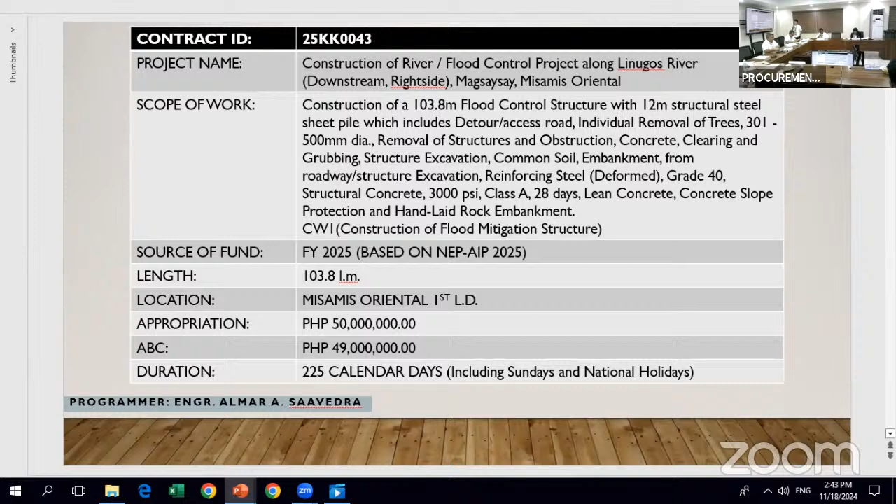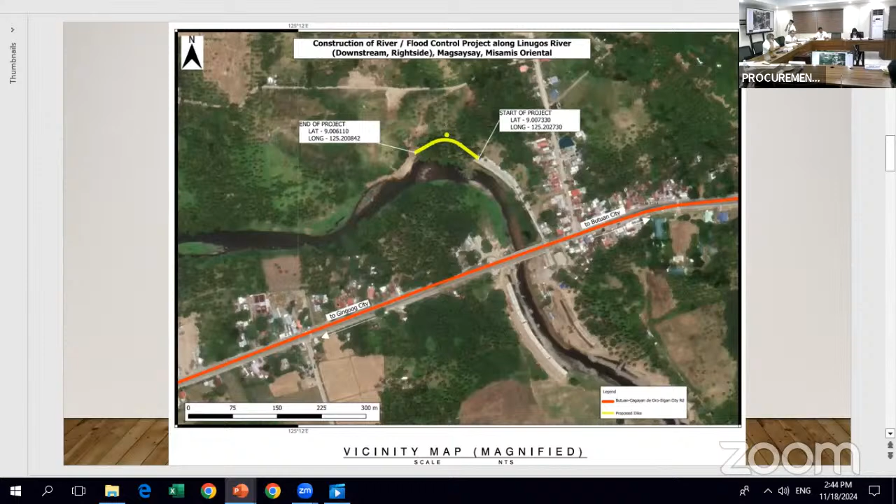This is the location map reflecting the footprint of the proposed flood control. Next are photos taken during the survey.

This is the plan and profile with a 1.5-meter freeboard. This is the proposed flood control.

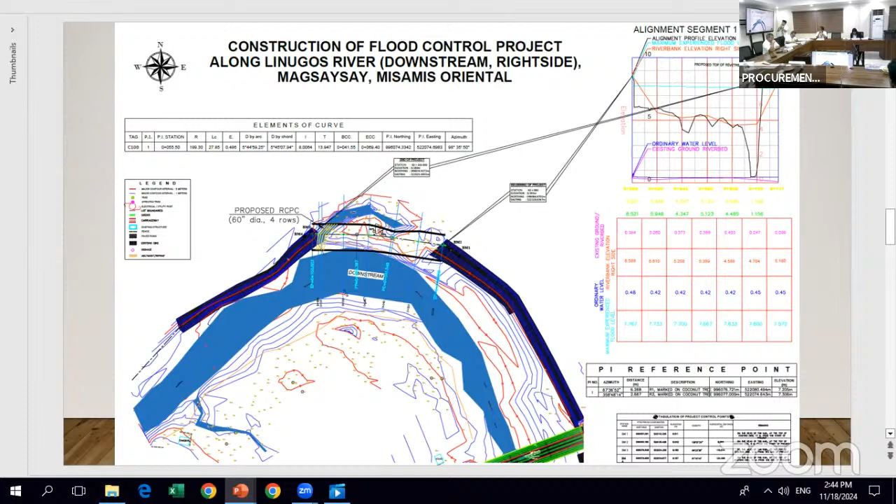This is the typical cross-section for the proposed flood control, with a 2-meter crest, 1-meter berm, concrete slope protection, lean concrete, and hand-laid rock embankment.

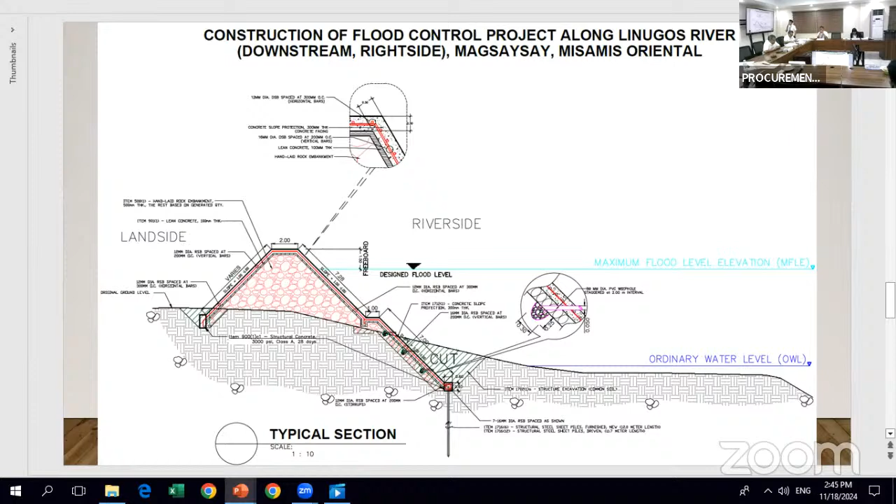Here is the specific bill of quantities for this project. We have provision of field office for the engineers, 7.5 months. We have provision of furnitures, fixtures, equipments, and appliances for the field office for the engineer, one lump sum, which consists of 2 sets of computers.

Next is the project billboard and signboard, each. Occupational safety and health, 1 lump sum. Mobilization and demobilization, 1 lump sum. Detour access road, 1 lump sum, which is beside the road, to make an access road.

Individual removal of trees, 32 each. Removal of structures and obstructions, 600 cubic meters. Clearing and grubbing, 3,285.75 square meters, and structure excavation, common soil, 3,285.75 cubic meters. Embankment from roadway excavation, 657.15 cubic meters.

As for the reinforcing steel grade 40, we have 2,500.74 kilograms. We have structural concrete, 3,000 PSI class A, 28 days, 94.08 cubic meters. Lean concrete, 283.18 cubic meters. Concrete slope protection, 835.23 cubic meters.

Pipe culverts, 1,520 mm diameter, class 4 RCPC, 96 linear meters. Structural steel sheet piles, furnished and driven, 2,076 meters and 2,024 meters respectively. Lastly, hand-laid rock embankment, 3,536.09 cubic meters. Next are the minimum equipment requirements for the said project.

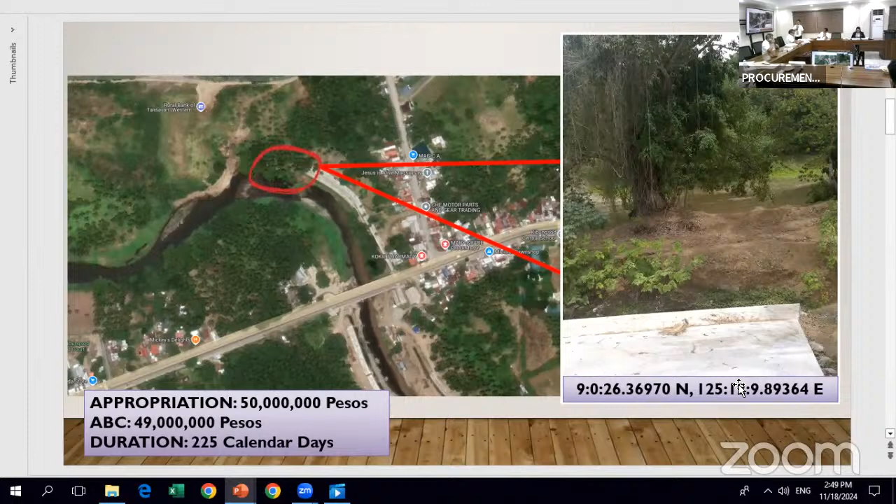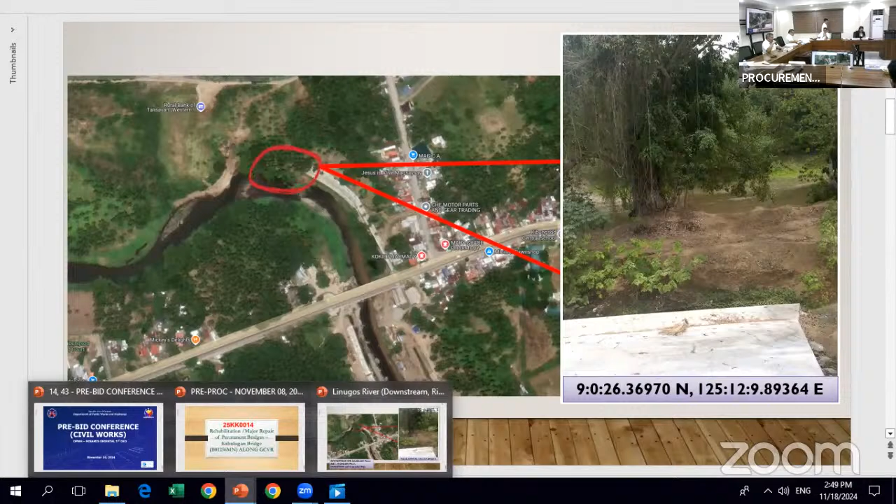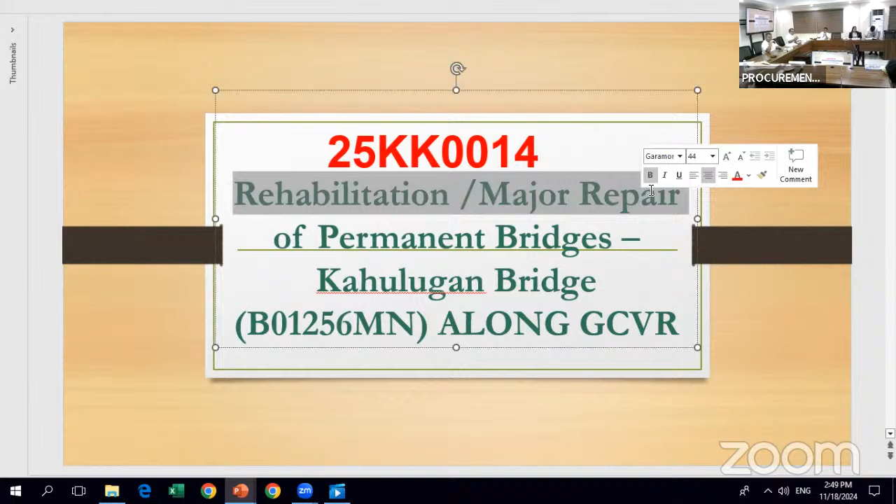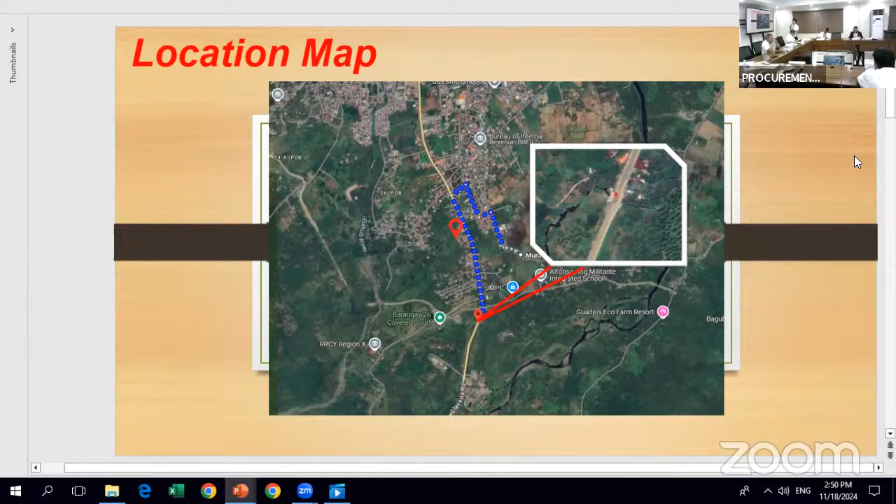Good afternoon, ma'am and sir, and our YouTube live viewers. So, for the second project, which has a contract ID of 25 KK0014, or widening of permanent bridges, Kahulugan Bridge, along GCVR. So, this is the location map, which is located at Barangay Kahulugan, Gingoog City, Misamis Oriental.

So, the total bridge length is 15 meters with an appropriation of 15 million, approved budget cost of 14,700,000, and project duration of 197 calendar days. So, this is our topographic map of our project.

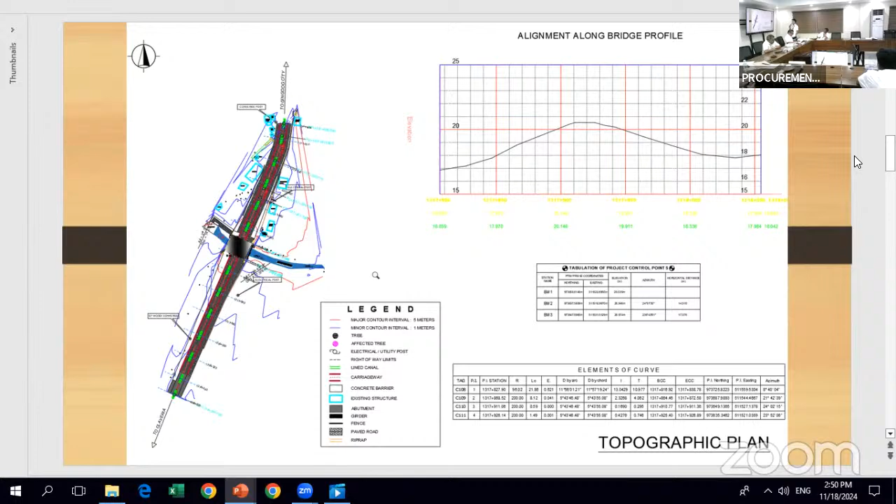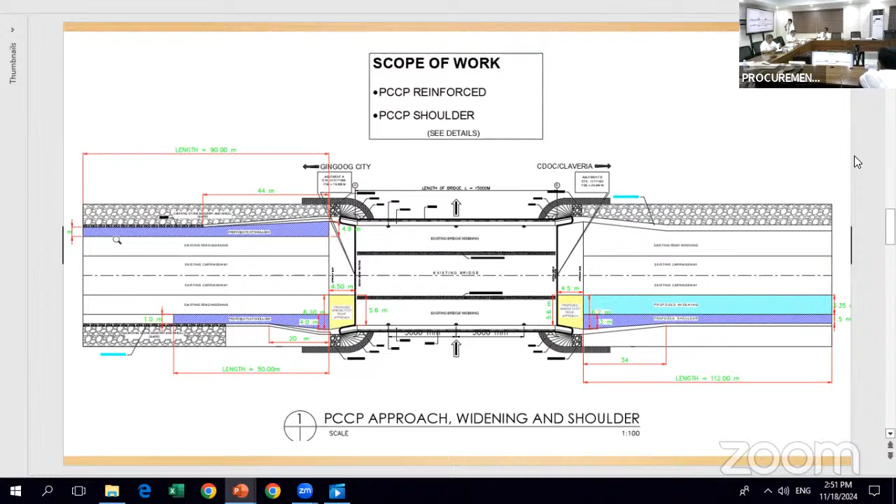And these are the scope of works of our project. First, we have PCCP reinforced for our approaches, and then we have PCCP shoulder. We also have stone masonry for our slope protection, and then we have wheel guard and painting of wheel guard.

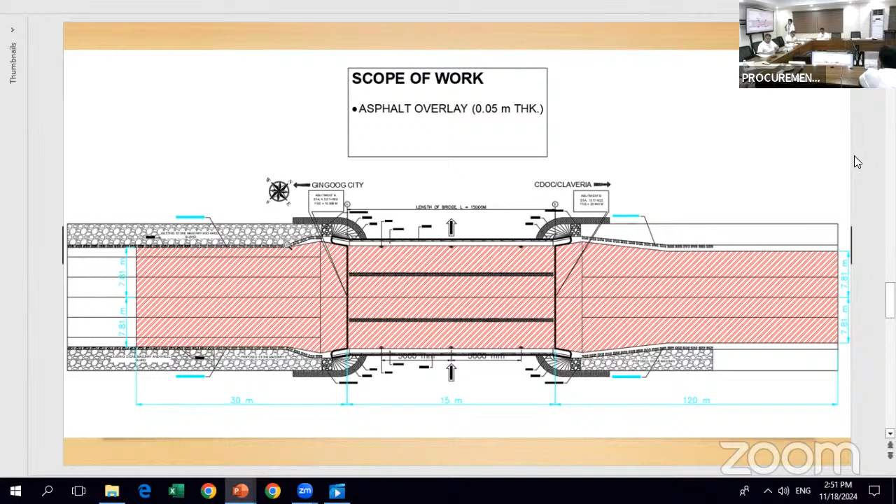We also have asphalt overlay, 0.05 meter thickness, including bridge deck and approaches, which is 120 meters for approach B, and 30 meters for abutment A. Lastly, we have reflectorized pavement markings, white and yellow.

So these are the items that are included in our project. First, we have provision of field office for engineers. We have project billboard or signboard. We have occupational safety and health program, traffic management, mobilization, demobilization.

We have surplus common excavation. We have structure excavation for soft rock. We have aggregate surface course. We have emulsified asphalt, bituminous concrete surface wearing course, hot laid, which is 50 millimeter. Portland cement concrete pavement, or PCCP, and reinforced, which we have 0.23 meter thickness, 0.30 meter thickness, and for the reinforced, we have 0.30 meter thickness of PCCP. And we also have painting for the wheel guard, stone masonry, reflectorized thermoplastic pavement markings, white and yellow.

And that would be all. Thank you.

So any questions? From the online viewers, none. So there's no more question and clarification from the online viewers and from the Bid and Awards Committee. So we will proceed for the technical document requirements.

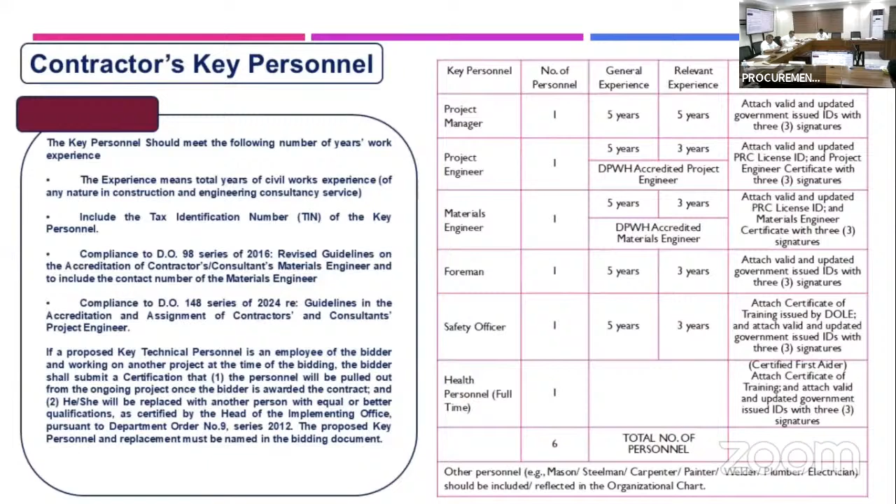Note that a certificate of training and a valid and updated government issued ID with 3 signatures should be added. All in all, there should be 6 total number of personnel. Other personnel such as the mason, steelman, carpenter, painter, welder, plumber, or electrician should be included or reflected in the organizational chart.

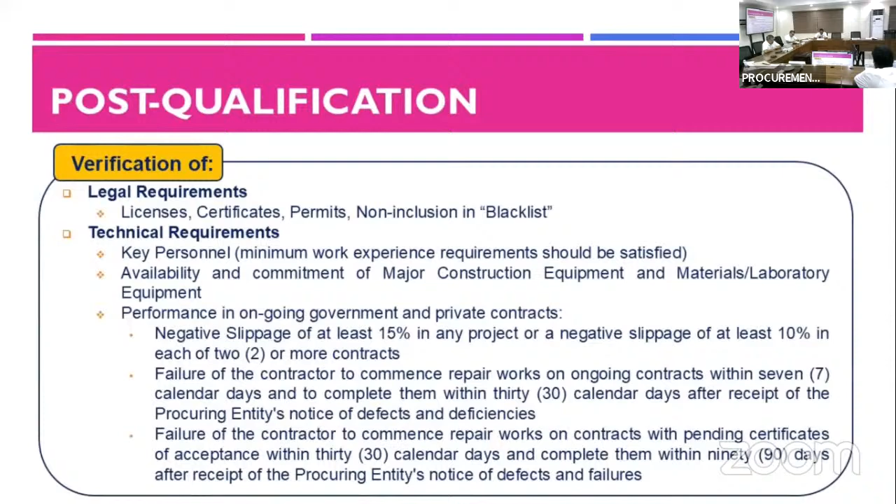Failure to commence repairs on contracts with pending certificates of acceptance within 30 calendar days and complete them within 90 days after receipt of the procuring entity's notice of defects and failures.